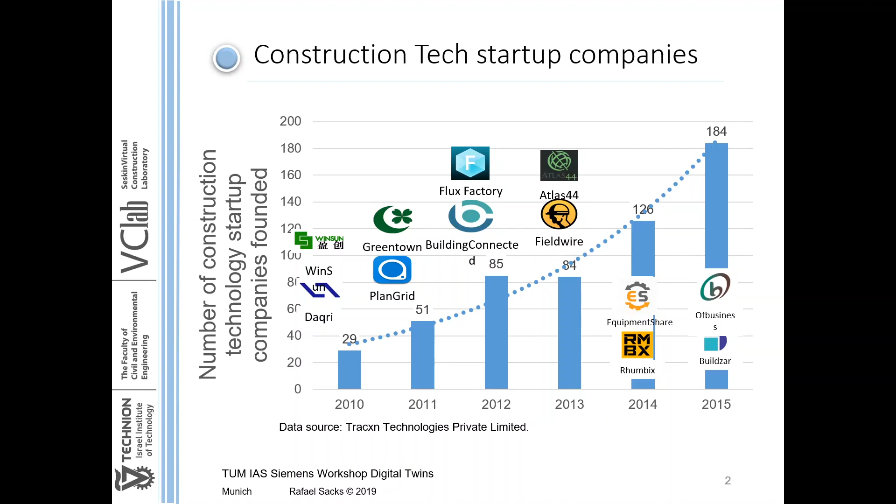Of course, some of them don't survive. I learned at lunchtime that Daqri on the left there have already ceased to exist over the last few months, and I guess that many of the others over time will rise and fall. We know that some 90-something percent of startup companies do not succeed in the long run. Those that do succeed are often very successful in their own right, but even more commonly are then bought by other companies. For example, PlanGrid, somewhere here, has already been acquired, and a number of the others as well.

What I want to do is give you a sense of how these things develop, both within construction companies or major manufacturing companies in the construction industry, but in particular I'd like to trace a path from research, academic research, through innovation, through startups, and then into practice, and see some of these things - how they have not quite become reality yet, but are on the way to becoming more familiar.

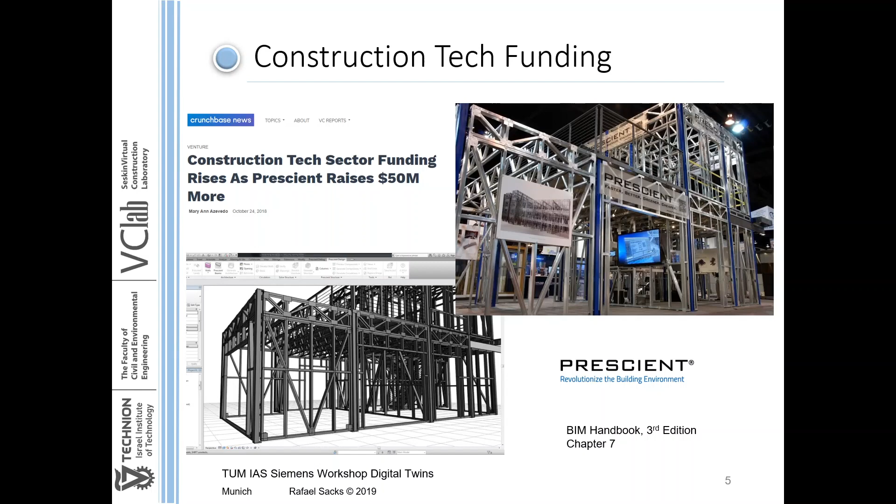So again, Prescient's a company in manufactured construction of this kind. Instead of simply carrying along and developing things as they might have done in the past, they're beginning to raise capital and to see this as an innovation. This is quite special, I think, in the construction industry, because we've become used to using these terms, high-tech. Our industry, our economy is largely based on high-tech - it's almost everything. It was once agriculture, but we recognize what we mean when we say high-tech.

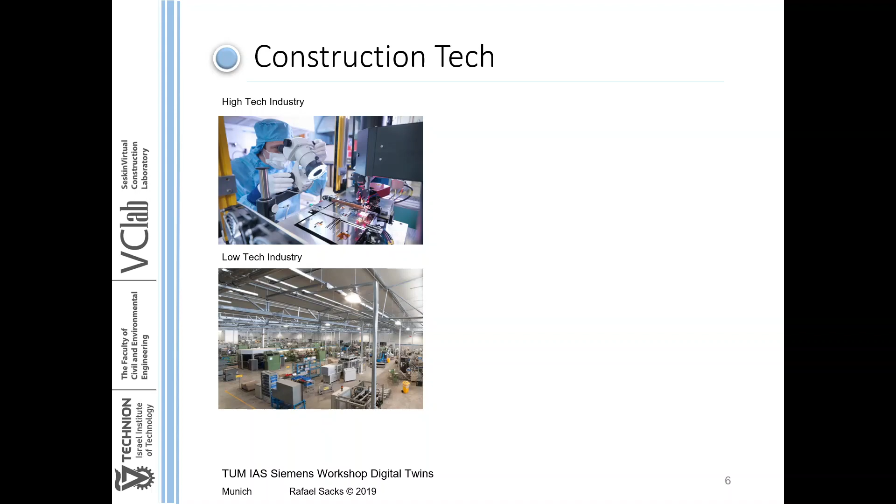We also have a sense of what we mean when we say low-tech, and in many places, people have the opinion that what we do is no-tech, and to a large extent that is true. But of course the construction industry is a spectrum, so there are companies which are like this, and there are others which are much more advanced, and that's continuing and growing more and more.

What's becoming apparent is that there are some specific paths of innovation. Sometimes it will happen within design and construction companies, that somebody will have a good idea, and a company will be agile enough to pick up on that and bring it forward as an innovation within the company. Sometimes they're coming from software companies, so there's no doubt that companies such as Nemetschek here in Bavaria, or Autodesk

and Bentley, they're all contributing their share to innovations in particular directions. But a lot of times, innovations in those companies are not actually coming from within the companies. They're coming through acquisitions of startup companies who've had some good idea, and then they're being bought by the bigger software company. One of the best examples is Revit, which began as an independent software startup in direct competition with

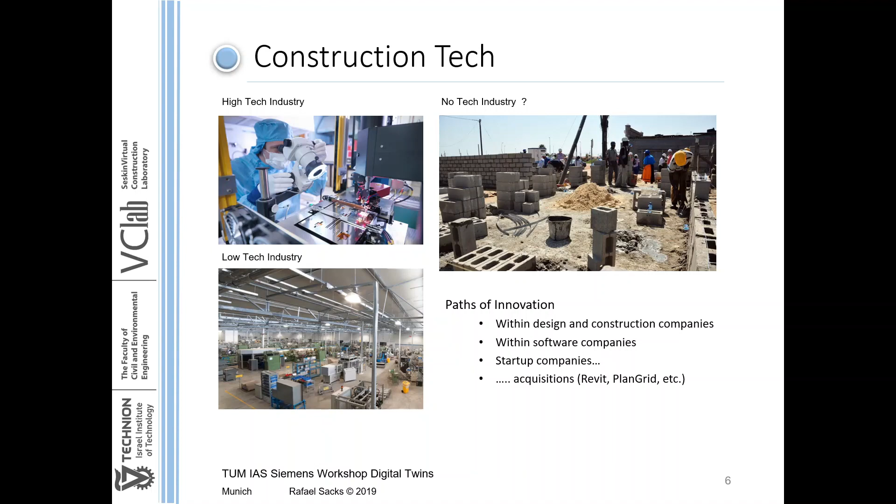AutoCAD and Autodesk in 2001, 2002, and we remember clearly Autodesk people coming and proposing software at Georgia Tech in a bigger research project in 2001. 2002, Ghang Lee was there and remembers that. And they claimed that AutoCAD was everything and Revit was rubbish and it was nothing. A week later, they announced their acquisition of Revit for $133 million. So something in what they were saying was not quite right.

So let's try to trace in a few words this idea of from research to startup and then sometimes to success and sometimes even to failure.

My PhD supervisor in the early 90s was Abraham Warszawski, and he had pioneered a stream of research that dealt with robotics in building construction. What you're seeing here is a paper from 1985 in the Journal of Construction Engineering and Management. At that time, they had these ideas of very generic robotics that could be done for various wall systems or other systems, things like this.

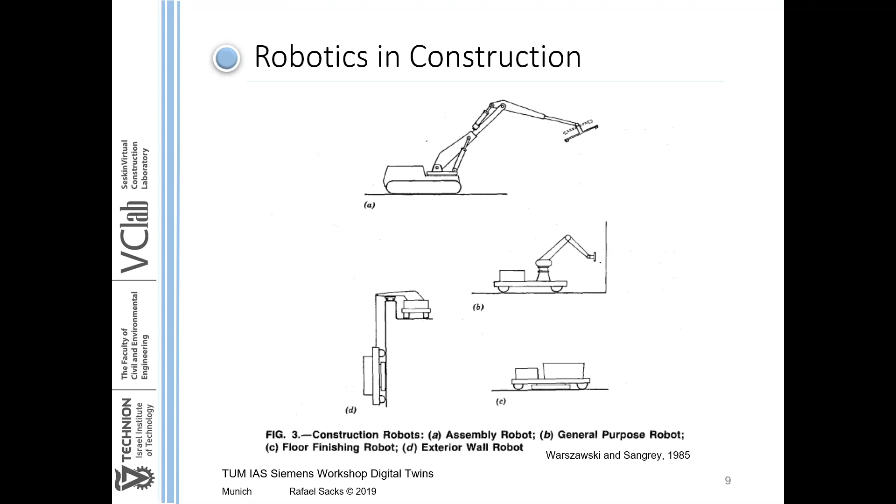They worked at Carnegie Mellon during a sabbatical on different configurations. The interesting thing about this is that they then, in the following years, built prototypes of construction robots of this kind, none of which succeeded. The challenge became that these were too sophisticated machines, and were far too expensive to set up and maintain. They could improve productivity, but the overall picture was such that they were not suitable and not economical for construction sites.

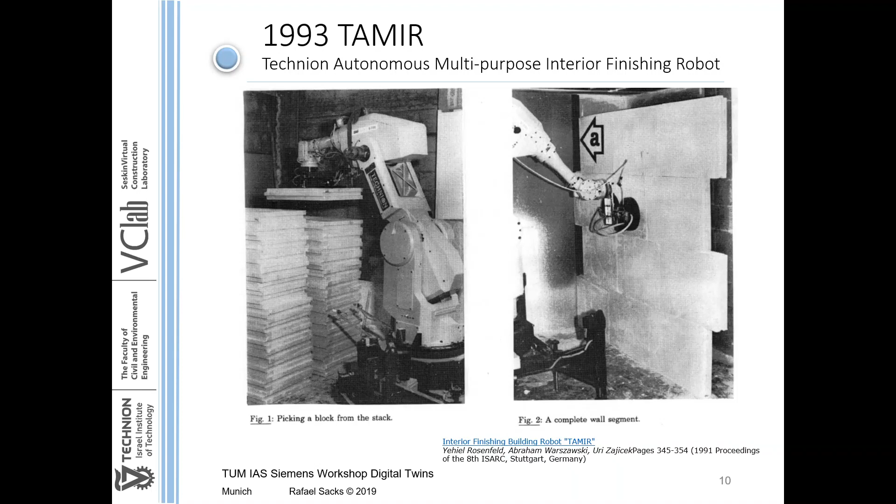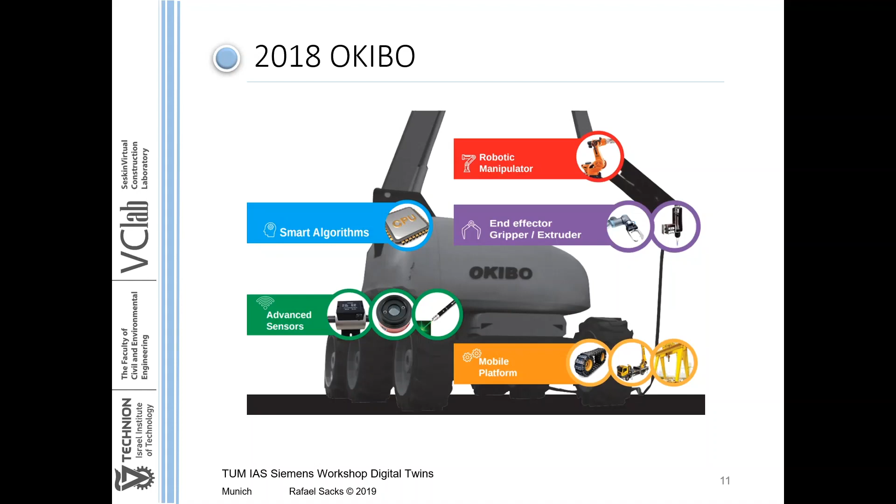And yet today, we see things like this. Okibo is a startup company, again, at home in Tel Aviv, and their idea is fairly straightforward. All they're doing is plastering, rendering on walls. They are sophisticated machines, and although this is just a rendering, this is just a quick video, the idea of using technologies that we have available now has become much more practical.

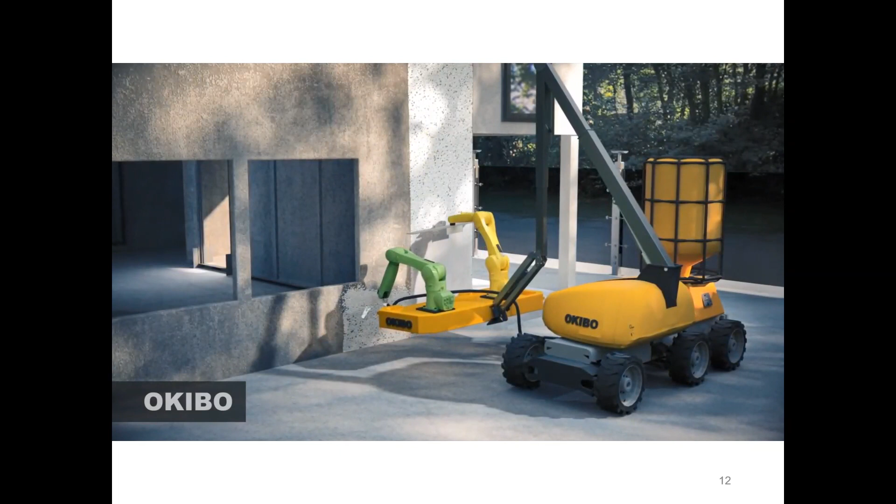I apologize for the music.

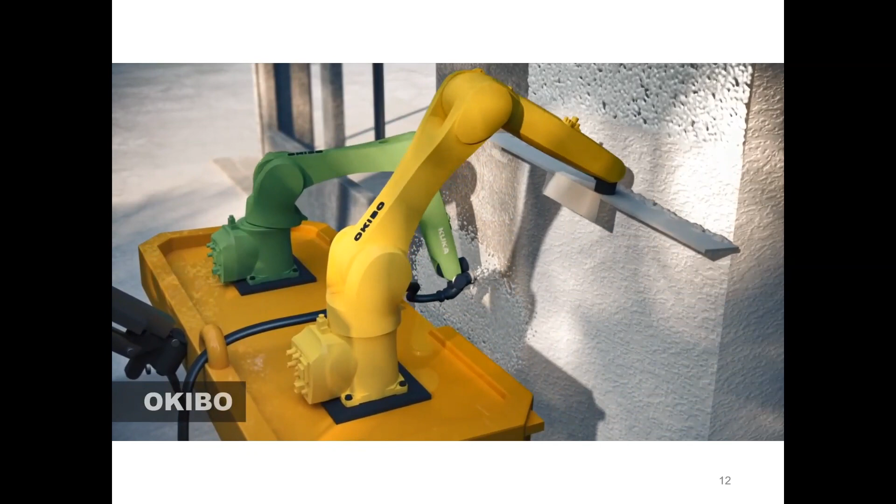We'll suffer the music for 10 seconds. But you get the idea that nowadays some of these tools have become a lot more practical.

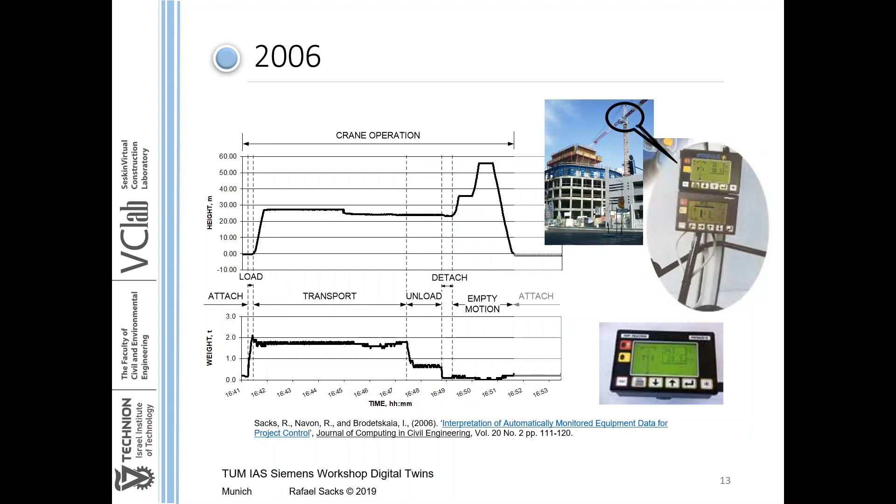Another example is from some of our work. In 2006, we did this piece of work where we used Liebherr construction cranes with a black box that was monitoring every movement of every part of the crane, and the data was there. The monitoring of the data was there. It was just a question of can you exploit it.

And today, there's this company, Versatile Natures, who are doing exactly that. They have this special hook, and within the hook black box, they have a great variety of sensors of different kinds, and that allows them to generate data about what the crane is doing, how it's doing, where it's going, how it's working, which then allows them to build up intelligence about what's happening on the construction site.

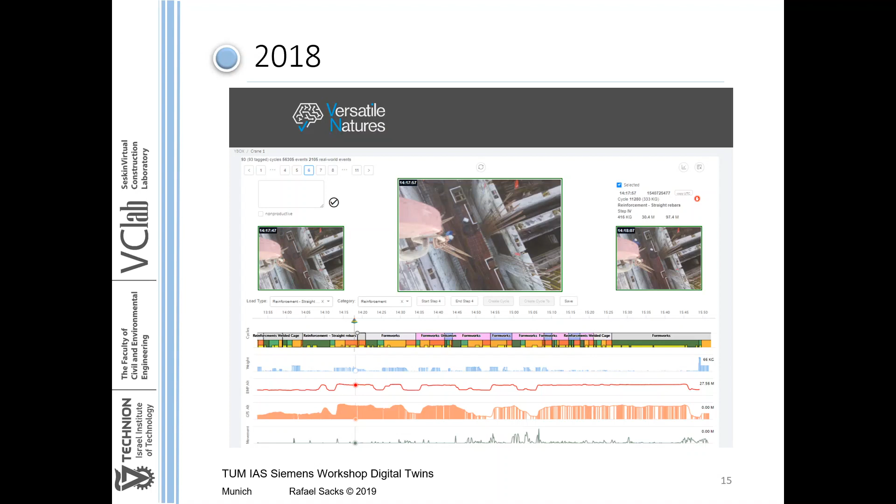So you have information about when different activities are done, and using some fairly simple machine learning, they can interpret what's actually being done on the site during those times. For example, you see 2 weeks of activity where every day you have the quantity of crane use, what it's being used for, including the time spent traveling and the time spent waiting, which then gives you a sense of whether your lean construction efforts on the construction site are working or not.

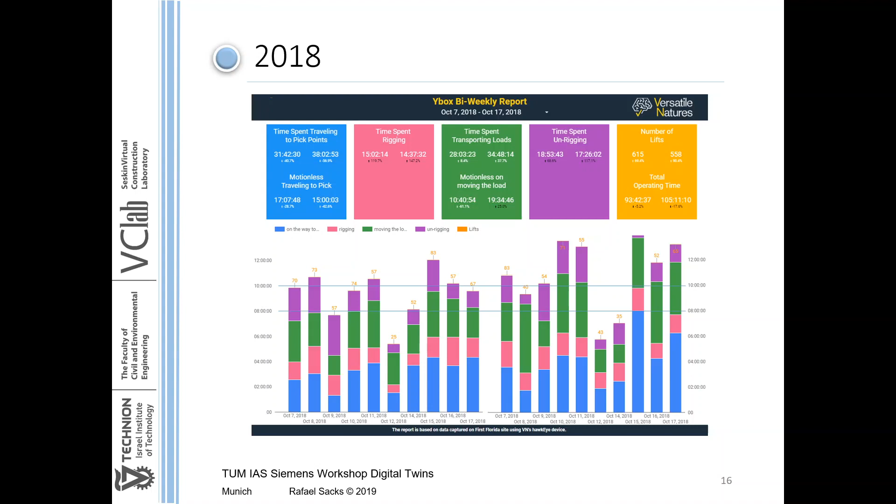And these are the kinds of analytics of dashboards that we've never had available in construction, but they are now becoming fairly common. So there you have a digital twin of the crane. There is another company which I'm not showing here called Intsite, which has now developed an entirely autonomous tower crane and mobile crane, so that you then get the operation as well feeding in.

Here is another piece of work that we did a good 10 years ago, maybe a little bit more, where the idea was to say, can we create interfaces for construction managers where they have an image or a BIM model of the building, and overlaid on that a sense of what we call situational awareness. And so the idea is that if everyone on the job site and everyone in the supply chain has a sense of what's going on in the building at any one time, then they can make their own planning decisions with much more information and much more reliably.

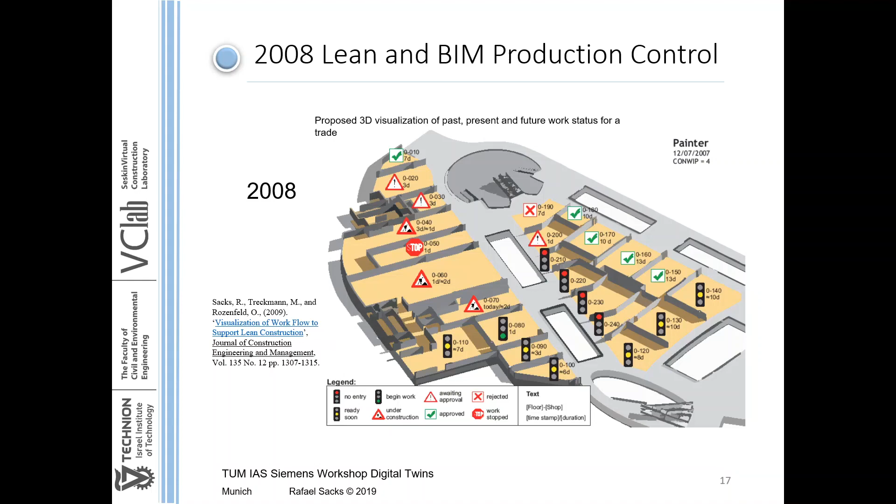So you see here, for example, a painter might know what the situation is for their tasks and where they need to bring resources and where they don't. But that, and this was just a mock-up, then led to a research prototype, which I'll show you in a moment. The general idea here is to merge lean construction and building information modeling. So Kanban from lean and BIM as BIM. So the prototype system was called KanBIM.

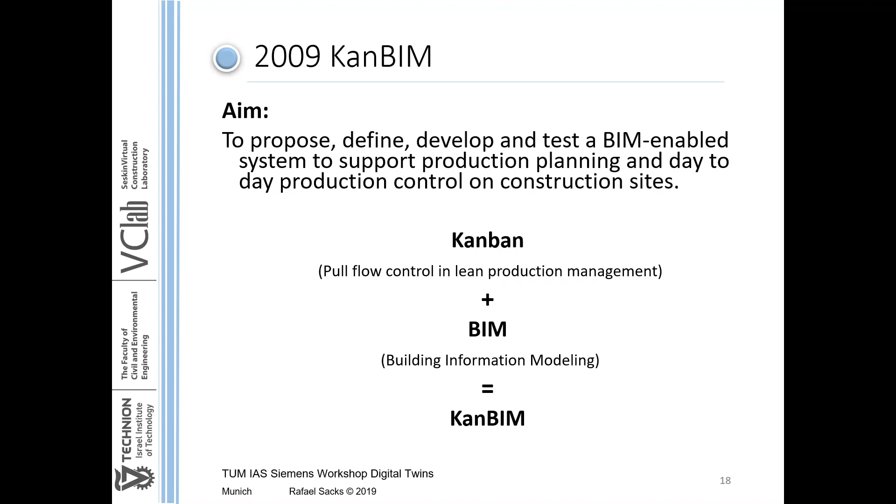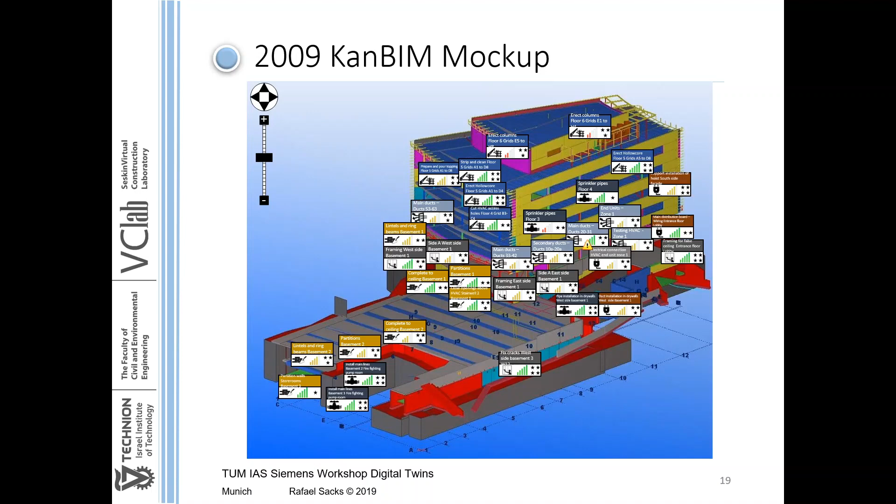And the software prototype itself in a research lab looked like this. So again, you could manipulate and move around the BIM model in any way, and you could know from these different tickets and labels what tasks were ready, what were mature, what could be done, what couldn't be done, and what was being done. It was delivered on laptops or on big touch screens on site, because in 2011 we didn't have all the mobile devices that we have now, which made the solution great in theory, works in terms of technology, but it's not accessible to people.

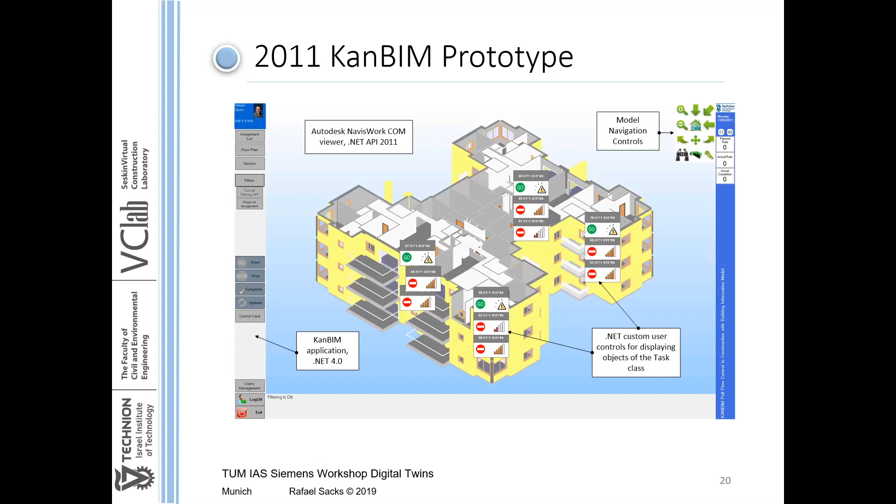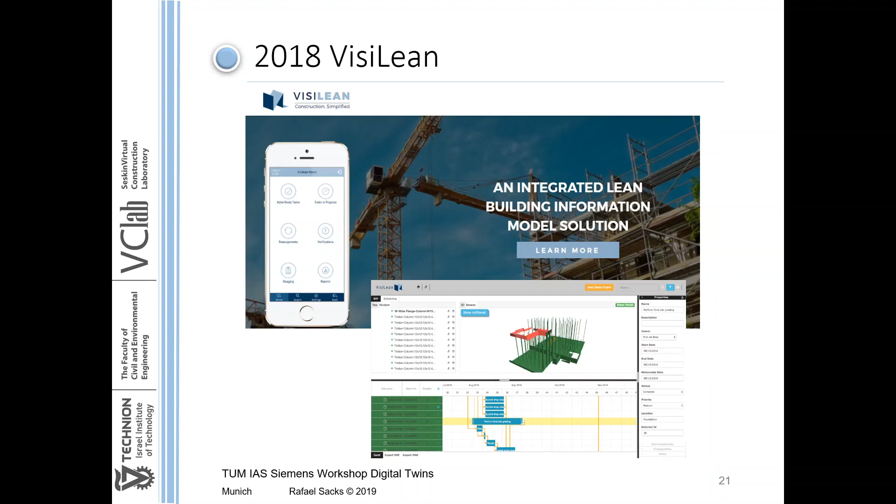And the big change, of course, that's happened is that now we have tablets and phones and a range of mobile devices, and so it's now become a commercial software called VisiLean, which is now spreading quite well and quite quickly. The idea being that it merges the BIM model with the construction scheduling and the ability for people to work with that day by day as they report what's going on, they learn what's happening. Situational awareness of supervisors, of construction workers, of supply chain, of deliveries, etc. is complete, so that they're all tuned into what's happening, and the last planner system is done online. Another simple image showing how this works.

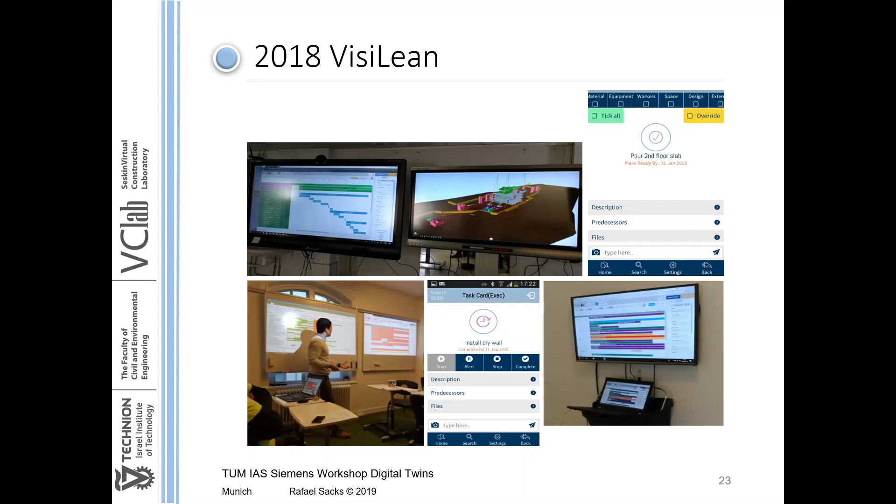My point in showing you these different ideas is that all of them, the robotics and the crane monitoring, the construction management service, which is a software as a service, all of them began as research projects 15 to 20 years before they actually began to be possible as commercial implementations. And of course there are many, many more. Here is another one that's a little bit more practical.

So you know that we spend a lot of time doing this kind of layout with chalk lines. Nowadays it's done with a robotic total station, which you then shoot points onto the floor. But in many of the trades, the points on the floor are not enough. Once you have the points, you need then to come and put in the lines between the points, which takes quite some time. And in lots of sites and lots of trades, you then have to transfer those lines onto the ceiling, because the floor is going to be occupied by materials, the chalk lines are going to be removed, the points themselves are going to be erased, so that once you have it on the ceiling, you have a reliable map, and then you begin working down the drywalls, the tracks, the MEP, and everything else.

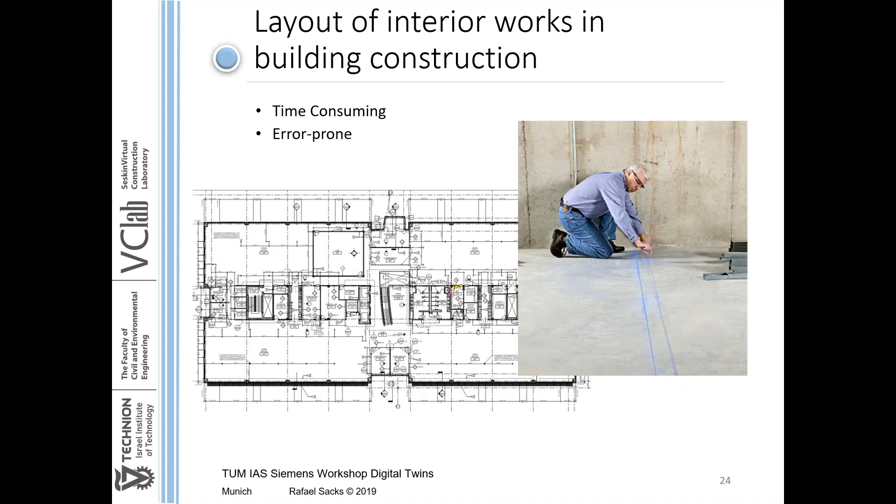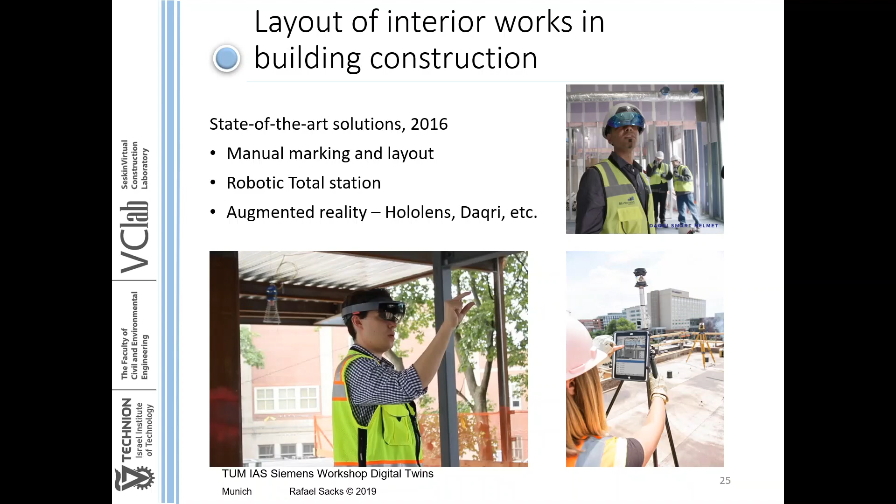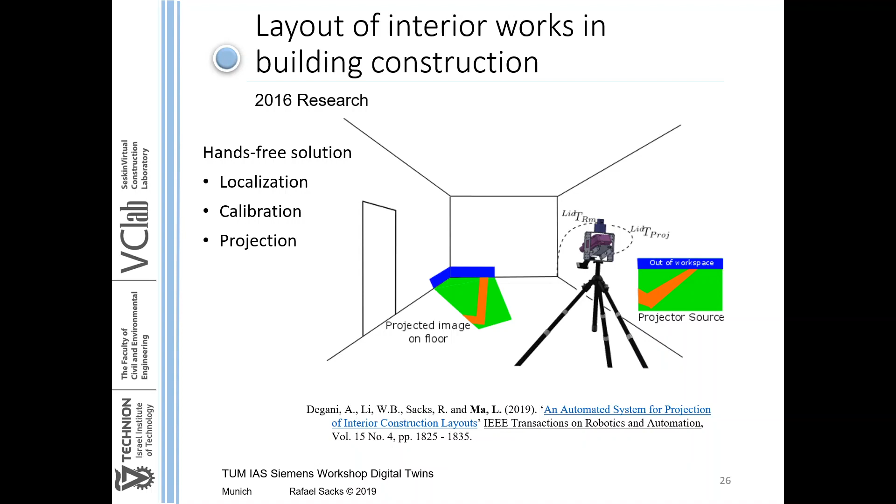But the challenge with all of those is that you encumber people with equipment, which is difficult when you're doing your job. So we said, well, how about we do this? How about we project the BIM model directly onto the building itself? So people don't have to have anything, not wear anything. And a research prototype. In terms of research, it was only published recently, but this began 4 or 5 years ago.

And the idea was like this, that in terms of research, you can take a tripod, a small laser scanner, a camera, and a projector, and mount them together. They work together to do the localization and the positioning, and then project whatever it is, in this case a bathroom, onto the work surface, so that you then know what to do and where to do it.

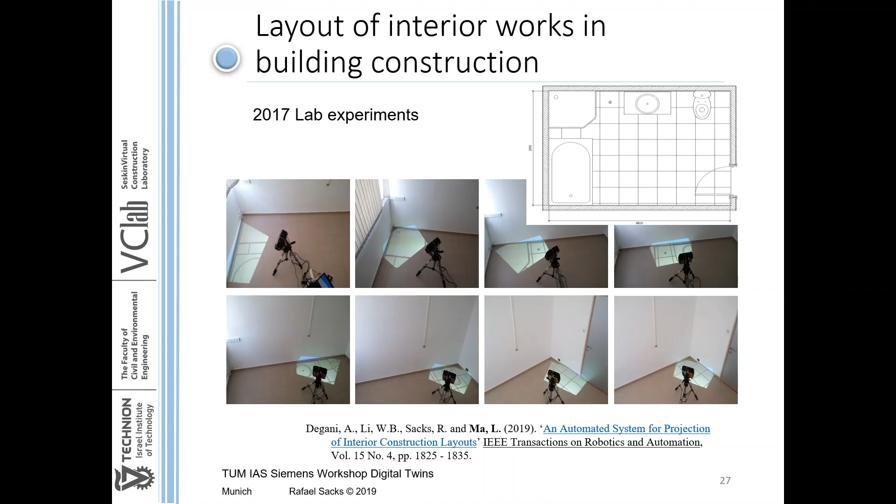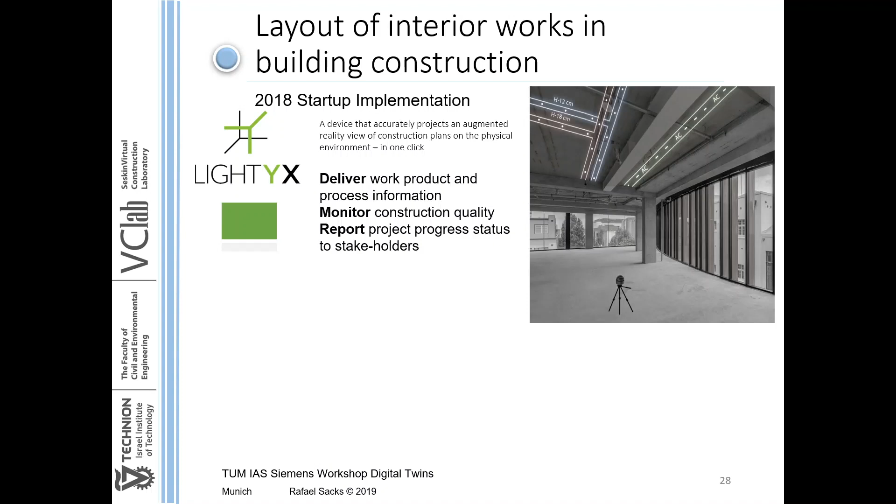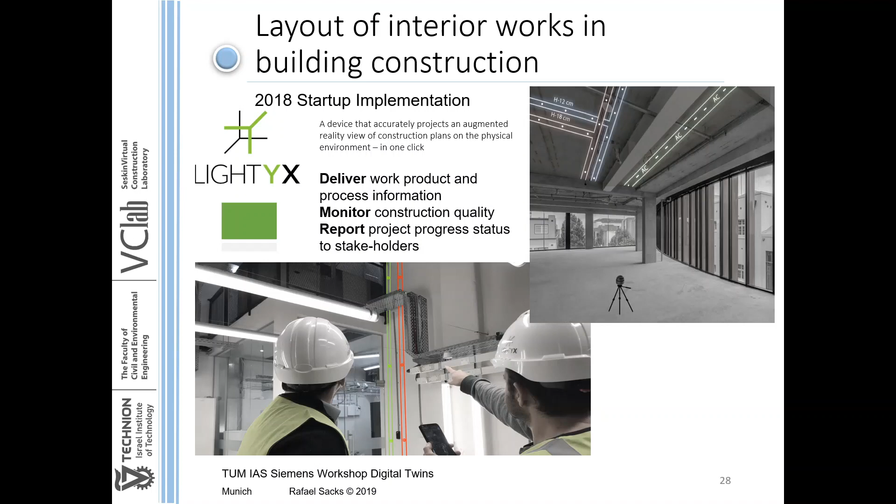You also then, because it's mounted in the tool that they have built, there is a laser scanner. You can also at the same time monitor what's being done and then provide feedback. So you're essentially telling people, as you see here, where to do things, and as they do it, you're monitoring and telling them by voice, it's in the right place, it's in the wrong place, and then confirming that it was done back into the monitoring system.

This is a photograph from a month ago at a construction site in London, where the equipment is still in a beta system, but it's already working and showing how to project the lines onto the floor, and so it makes construction much easier. You can project on the floor, on the ceiling, wherever you like, of course, on the walls.

And lean production theory, meaning if we understand correctly on a theoretical level how production flows in construction, all of those understandings, together with the BIM technology, which is, of course, not only the technology, but the processes and the people, the BIM way of working, if you like. If we have that foundation, then people can come along and innovate.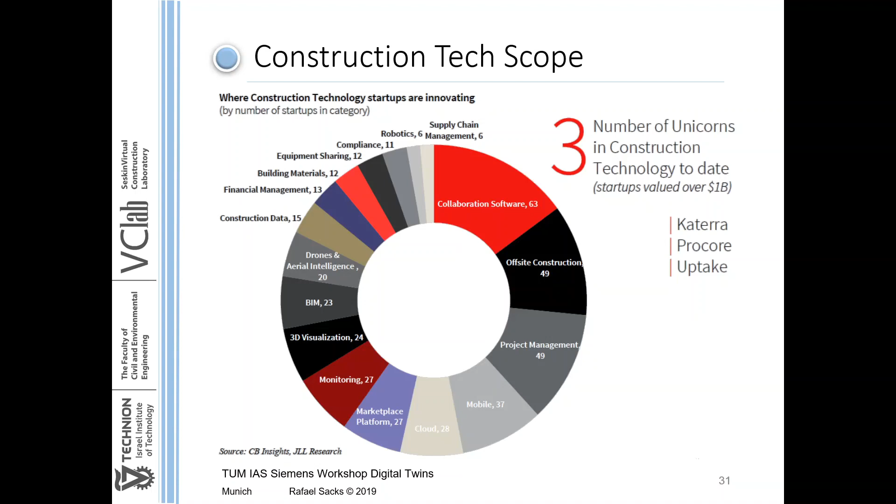So we even see this now in digital twins. So you can have a look around on the internet and visit companies. And I was able to pick out just 5 companies, some more traditional startups, some less traditional startups, but nevertheless, they all share the activity within the area of digital twins.

There's a company called Tunnelware, where they are creating images and digital twin models of the geometry of tunnels, but then they're collecting all the maintenance information and all the rest to go along and to present it to the maintainers of such tunnels, how these things work. A similar one called Willow,

headquartered in Australia. Dynamic Infrastructure, another Israeli startup, where again it's tunnels and bridges, and it's about creating models very similar to those that Ilka showed us this morning, where you are collecting the images but then continuing to maintain the database behind, and they offer it simply as a software as a service with the whole database service, so to speak, a one-stop shop.

I learned recently that Siemens are very active in this area, and Herman might, I don't know if there's an opportunity to explain more, but we've learned a great deal about your work and how especially the property graphs and the knowledge graphs are being used to create a layer of information that brings in information from all the monitoring and all the 3D models to create a platform on which API then you can build all sorts of use case applications.